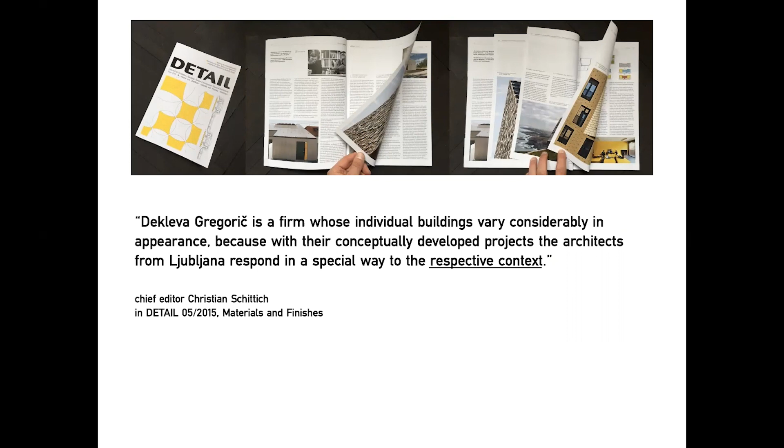So Slovenia is contextually very, very diverse. It spans from the Mediterranean to the Alps, although it occupies a very small territory. And in one of the interviews in Detail magazine, we stressed that our output varies considerably in appearance because our conceptually developed projects respond in a very specific and special way to the respective contexts where they are built. So if you see a picture portfolio of our office, you'll see a very diverse formal and visual approach, precisely because each building responds to its context, and it also responds to the people who are occupying these buildings, and they inform how these buildings are shaped and designed.

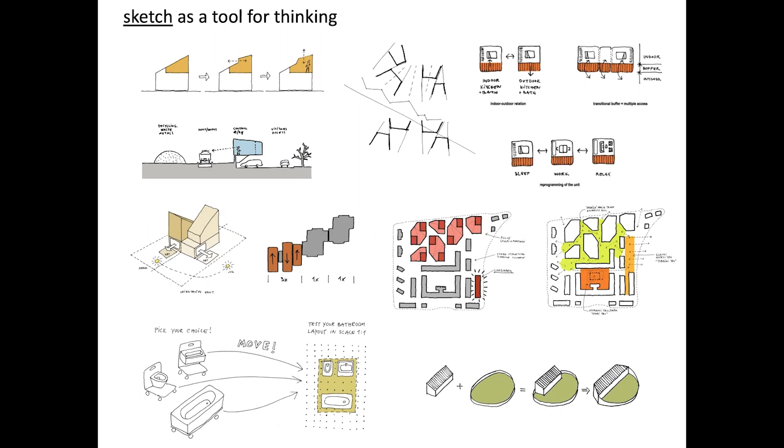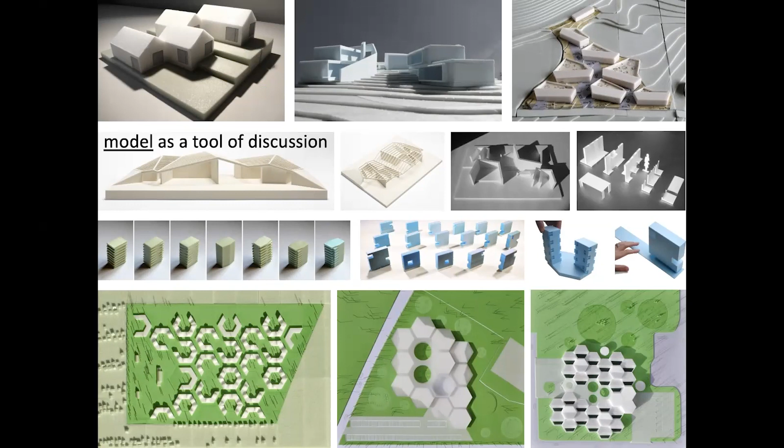But we take the sketch as the tool of thinking. So the process of thinking, we like to think, is always the same. It is always questioning in a similar research way what is the task at hand, what is important, and how that can be solved in a design piece. So sketch is a tool of thinking for us, but the same way physical modeling is the tool of discussion. With physical models, we are testing out options and variations that can be discussed within the team, in the office, but also with clients or maybe even the public on a larger scale. So both these tools are very important for development of a project.

So another thing which we like to stress, what is important for us in the office, is the materiality. Architecture is a discipline characterized by materials, and very early on in projects, when you start grasping the first concepts, we like to bring the discussion of materials to the table.

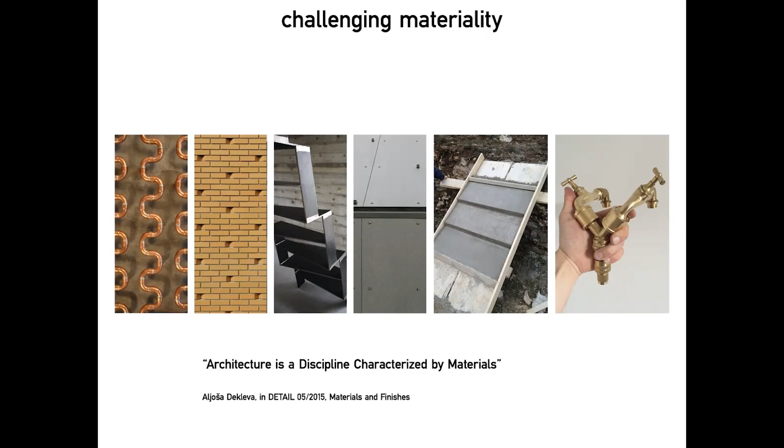In that way, the materials are playing quite an important role also in finalized outputs, finalized products, where we like to explore the possibilities that materials are actually giving us and to expose their specific characters.

So user, it's an important part of architecture because architecture is experience, and our buildings heavily rely on what users are specifying at the beginning of what they want those buildings to be. Sometimes it's easy to address a small group of users or one user in order to understand what it is, but sometimes we have to run scenarios in order to understand a larger user group, in order to embed those understandings into a building design.

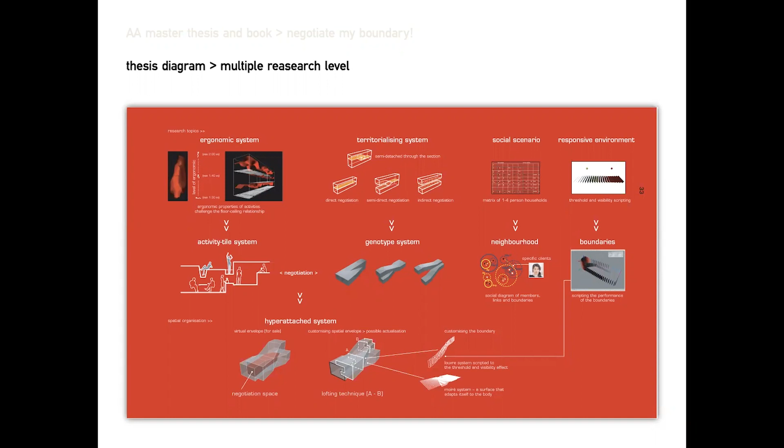So that's a diagram of the whole process that we were running through for a year and a half. We were studying ergonomic systems, territorial systems, social scenarios, responsive environments, and we created certain approaches or tools in order to create spaces, and we called our approach to design a hyper-attached system, in order to create a collective housing neighborhood in the middle of London.

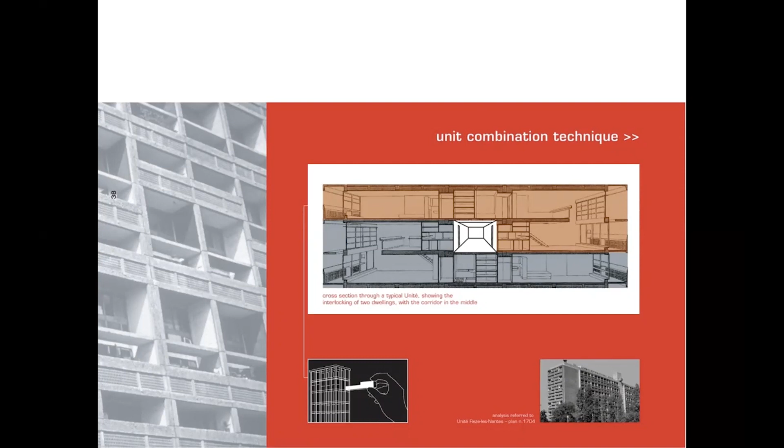We have started analyzing Unité d'Habitation from Le Corbusier, the one from Rezé-les-Nantes, in order to understand that these two units, interlocked units with a corridor in between, is a system that allows quite a lot of diversity. So we analyzed the whole block.

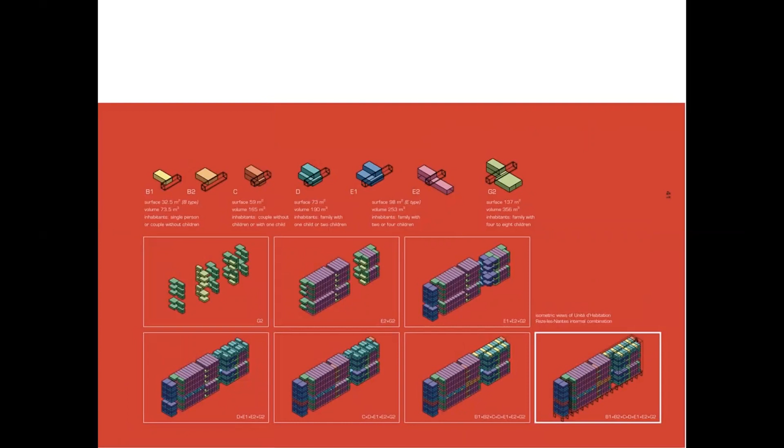We understood that there are quite a few different flat typologies, not just the one that Le Corbusier always shows in his diagram, which we saw before, very popular. But we understood how those units are interlocked and how they actually perform the different human needs in a very different way. So from a very small flat to very big units as well. So here we have a diagram of all different unit types and how they compound together in Unité d'Habitation.

But what we were interested in is how, from this research, the two units are interlocking together, and what are the possibilities that arise from having two neighboring units together, and what is in between. So is the between just a wall? Is it a between space? Is it something that we can share, and so on?

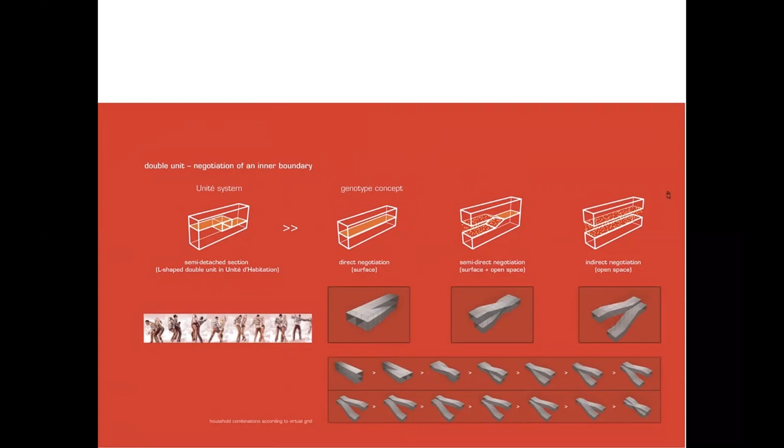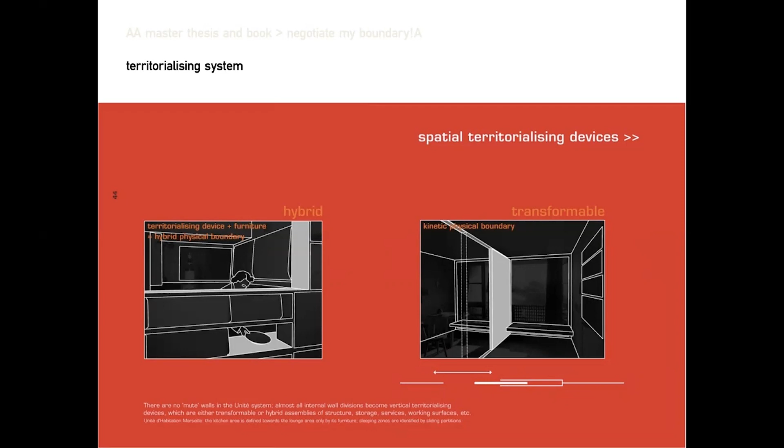So with this, we made different iterations of how two units could possibly interlock further on. We made a matrix of all the possibilities with a certain step of change. But we also started to analyze what are these territorializing devices. So what is in between different rooms even. So either those territorializing devices are integrated, or they are maybe transformable.

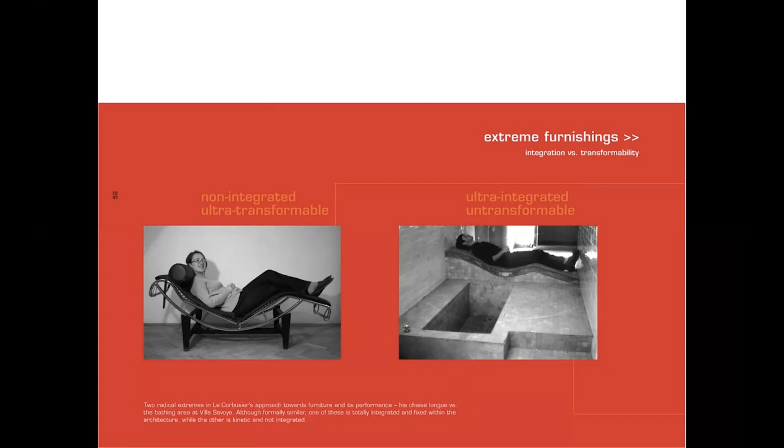We also looked at the furniture, which we categorized as non-integrated and ultra-transformable, that you see on the left, or ultra-integrated and untransformable, but part of the architectural envelope or mass.

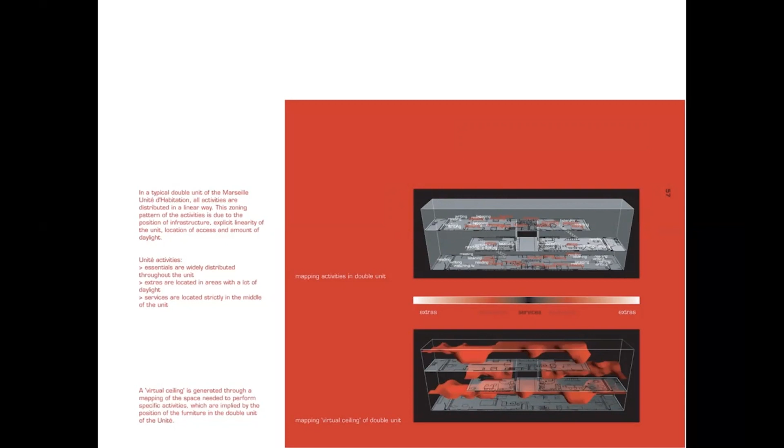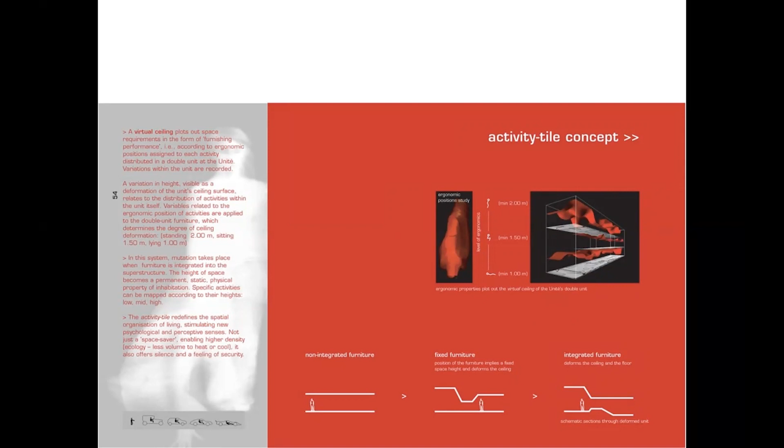So with this understanding, we went back to the Unité d'Habitation. We took the floor plan of Le Corbusier, and we mapped where each activity is being performed and how much space they really need in height to perform those activities. So we understood in the end that the floor and the ceiling can be challenged. They are not necessarily always flat surfaces.

So we came up with this conceptual section where we show this understanding of activities being related to the ergonomics of the human body and how those surfaces can interact and provide different spaces for humans to occupy.

So the next really important thing was the social scenario, to understand how society has changed. Twenty years ago, the trends were similar to today, but now they are even more emphasized. So most of the households are small households, maybe for one or two persons. There is an increase of the elderly population. In 2000, 21% of the total population were elderly. Then we understood that nuclear families still dominate the situation, but there are less and less. But there is also an increase in single parent families and different ways people are living together.

So we understood from there that you can make your own home public, and that you can also share your home, and that you don't need to own everything. You can maybe rent the service, or you can offer a service to somebody within your housing community. So we understood there is this notion of sharing, which is a strong potential, and sharing also brings negotiation.

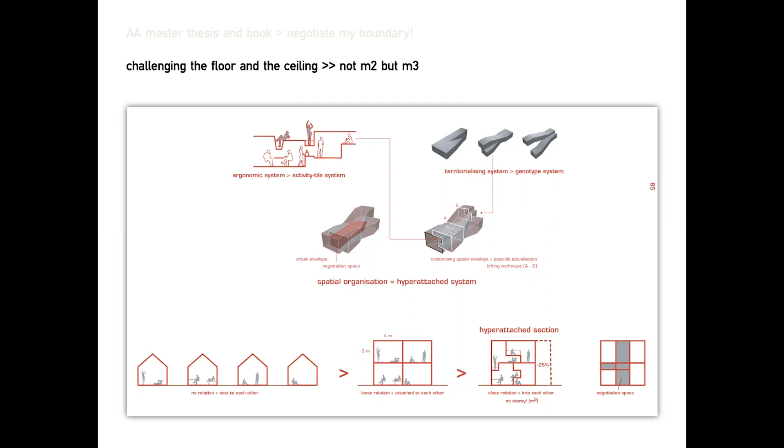allowing scenarios like that where two neighbors can communicate in a different way with spatial transformation of their wall in between, their boundary. And this led us to the idea of mass customization, of how collective housing can be mass customized.

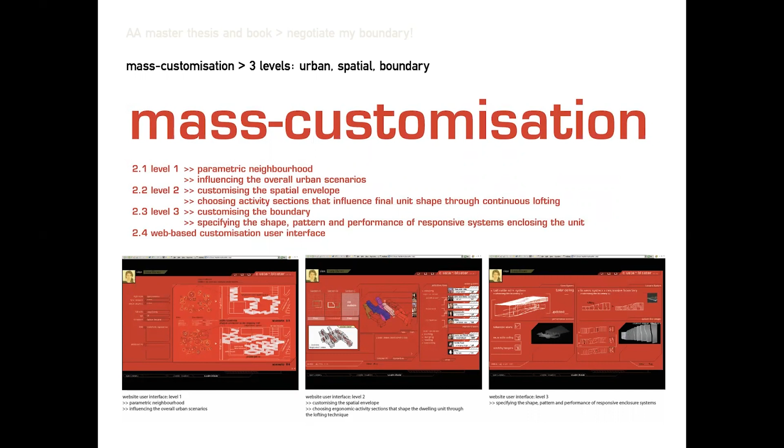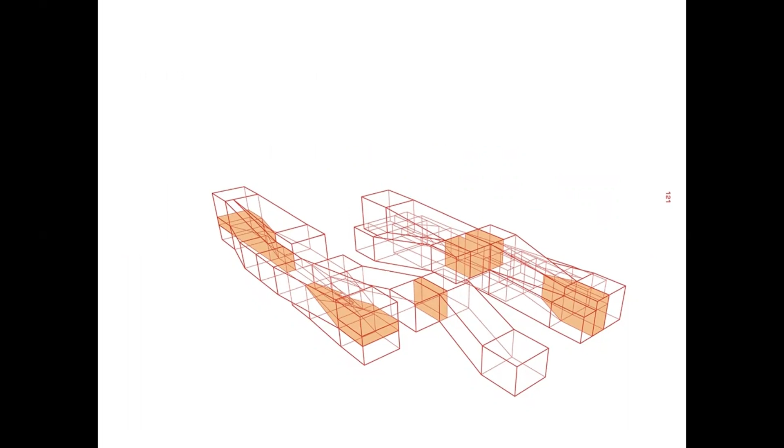So at the end, we came up with a spatial proposition where some of those spaces were to be negotiated, spaces where the people who are moving in can share them, and they have to reach certain agreements in negotiation. So we designed a web interface.

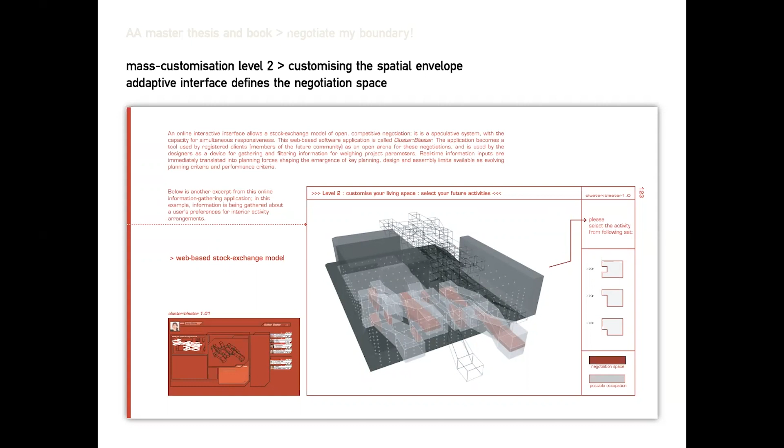Internet was a very new thing back then, where the society would form first online and then translate into reality. Quite similar to what the social networks are doing today. And you have to take into account that Facebook didn't really exist back then. So in a way, we were just before that.

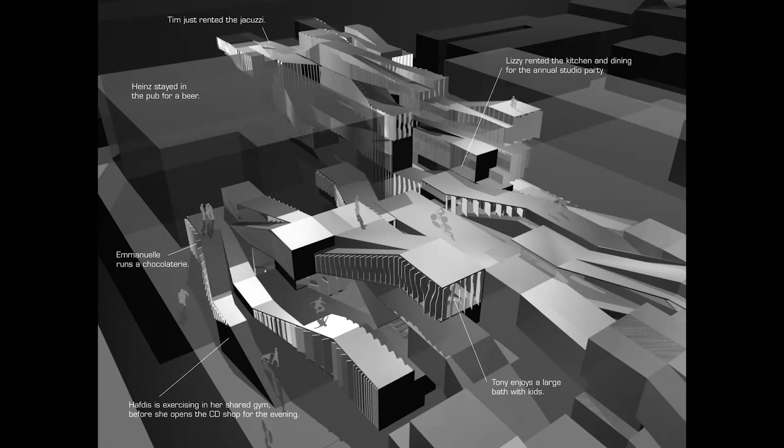So those social situations were translating into spatial scenarios. So at the end, next to King's Cross, this collective housing neighborhood looked and worked like that, with a set of social situations that were playing out through these scenarios of negotiation of boundaries between several units in this neighborhood.

Okay, so the second, more research part is the Home at Arsenale project. This was the Slovenian Pavilion for the Architectural Biennale in 2016 in Venice, where Tina and I were invited to curate it. So Alejandro Aravena invited us to explore the frontiers of architecture.

And we understood that if we address housing, that is going to be quite important; housing is defining most of our built environment. So it is important to address housing in order to address the most important aspects of human life as architects. So we decided to answer Aravena's question with research on housing.

So why home? Since the dawn of civilization, the structures of dwelling have constituted the predominant part of our built environment and have served to fulfill our most basic needs, but yet they should also go beyond just surviving. They should also provide the conditions for a meaningful life. And of course, the definition of home has continuously been questioned through history and through different cultural settings.

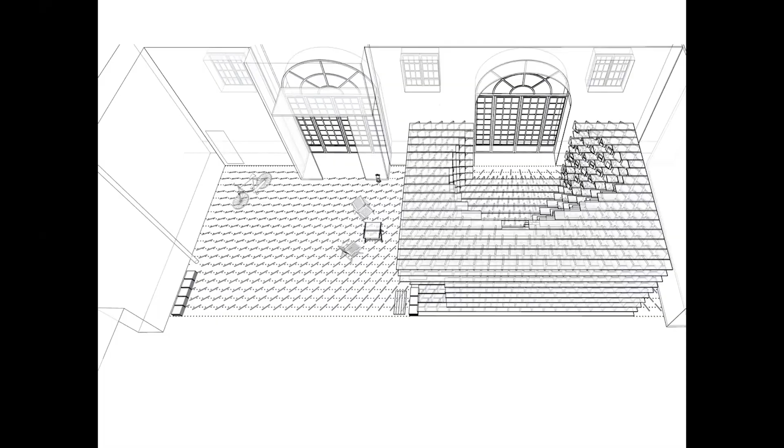And that was the reference to a project of Alison and Peter Smithson, where they did this installation, the Patio and Pavilion project in '56, where they said that the patio and pavilion represents the fundamental necessity of human habitat. The first necessity is for a piece of the world, the patio, and the second necessity is for a closed space, the pavilion. So in a way, this dichotomy, duality, was embedded in our pavilion as well.

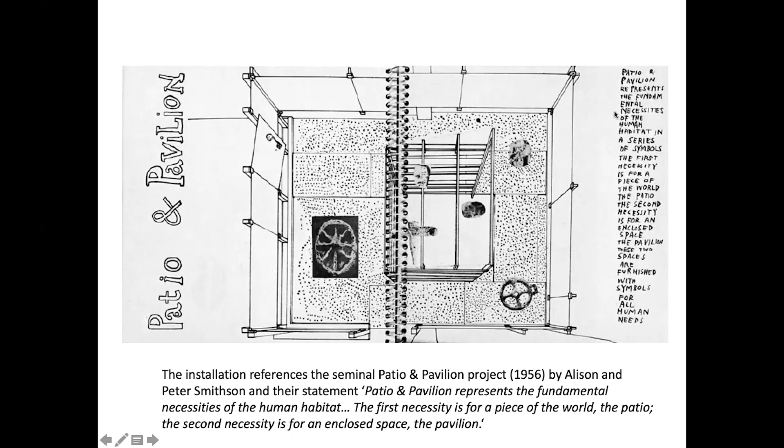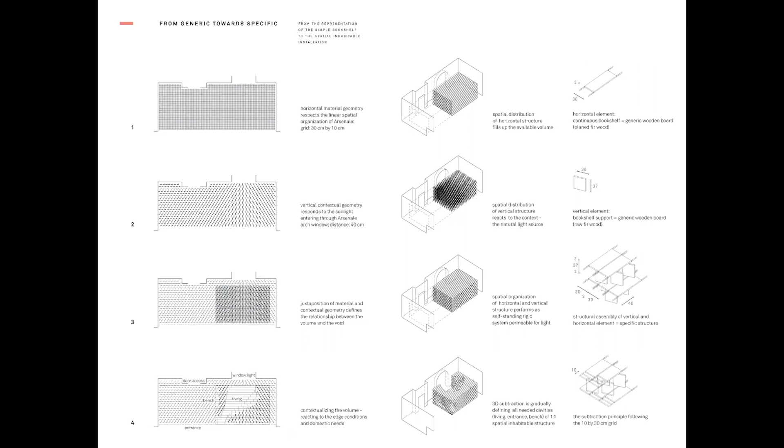So we filled it up with shelves, a generic shelf, like a piece of a wooden shelf that will be continuous coming through the pavilion. And then we started to carve out the spaces from this mass of 3D shelving in order to create accommodation for the books. So the structure at the end looked like that.

It was fully wooden. Why? Because Slovenia is very much related to Venice through wood. All of those oak pylons on which the city on the water is put come from the karst region, which is partly from Slovenia and Dalmatia. It's a big historical connection. But also more than 50% of Slovenia is covered with forest. So this also speaks about our national position. So the pavilion was like that.

And then in the process of collecting the books, we invited a little bit less than 30 professionals, not only in terms of architecture, but also designers, historians, theoreticians, writers, to propose maybe around 10 or 15 book titles, books that would address either the context from where they are actually coming from, or maybe something from their work. And the people we invited were spread around the world, so we could cover diverse cultural backgrounds. So everybody participated.

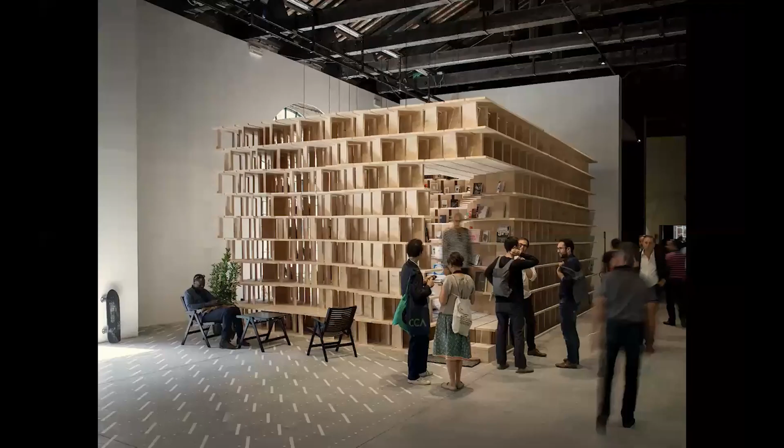But we also organized a set of events. So every week there was an event which invited either student workshops or people participating in conferences to discuss the topics of why home and dwelling is important and what it is. So what is characterizing home and dwelling today. So that's how it looked. Maybe some of you can remember it if you were there.

The books were exposed with the covers, so they were communicating with you, so everybody could spend here maybe just a minute to see the structure and the whole thing. But there were also people sitting down and reading through those books, and everybody got a surprise because it's such a diverse selection of books. It always offered a surprise to everybody, even though they were really knowledgeable people coming in here and engaging with our pavilion.

So not just the bookshelves, but also the stage for presentations, discussions, student workshops, but nonetheless a very important place for kids. Quite a few books in the selection were books for kids, understanding what defines home through the kids' perspective.

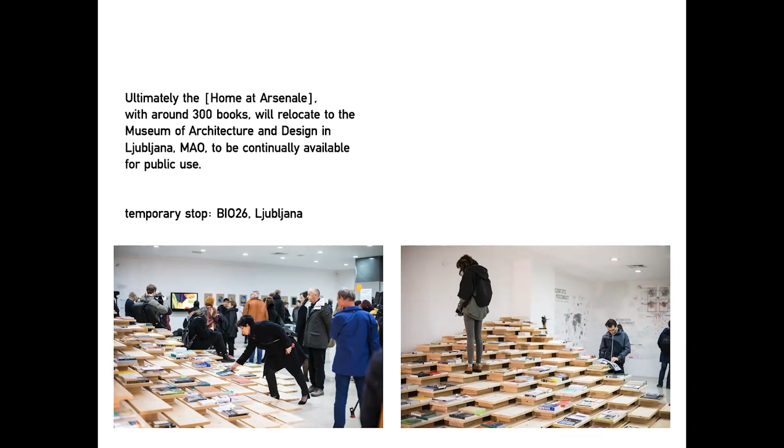So at the end, we wanted to create a pavilion which follows the concept of zero waste. So at the end of the Biennale, we disassembled the structure, we brought it in, and we reassembled it for another exhibition and showed the books once again. Until the books were brought to the Museum of Architecture and Design Ljubljana, where they are available now for everybody to browse. So they are back to the community, and we donated the wood from the pavilion to the Faculty of Architecture, which used it for equipping one of their experimental classrooms.

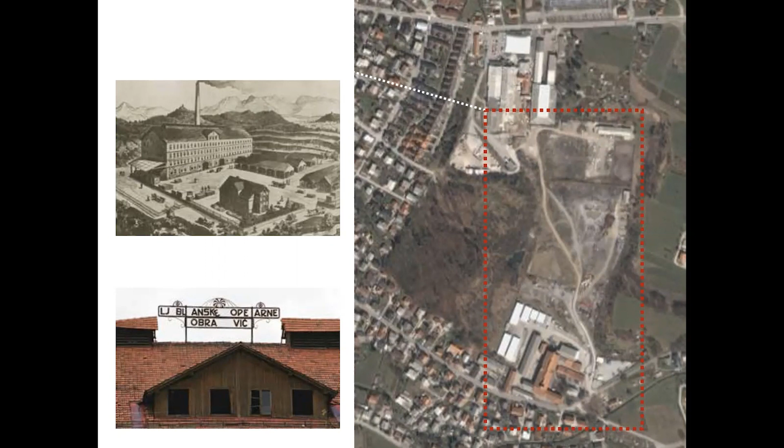So going to the practice, 3 projects: Brick Neighborhood, New Brdo, and Housing Novo Brdo. Brick Neighborhood is a competition we won in 2005. It is in Ljubljana, in the center of our country. It is on the edge of the city, in the area where formerly there used to be a brick producing factory. So they were excavating clay and producing bricks, mostly for building Ljubljana throughout the 50s, 60s, 70s, after the Second World War.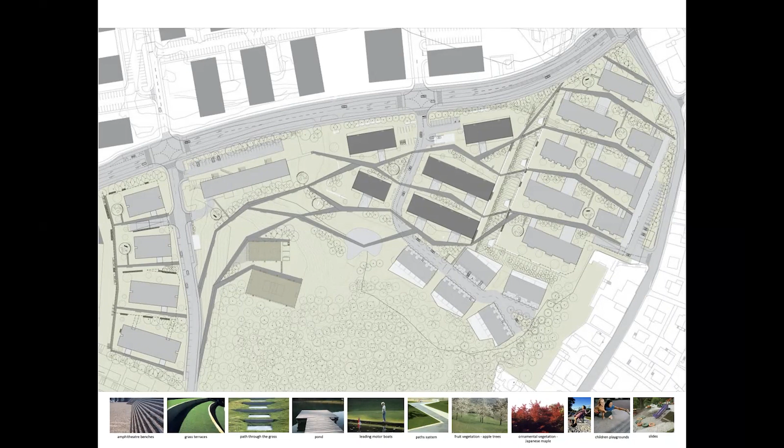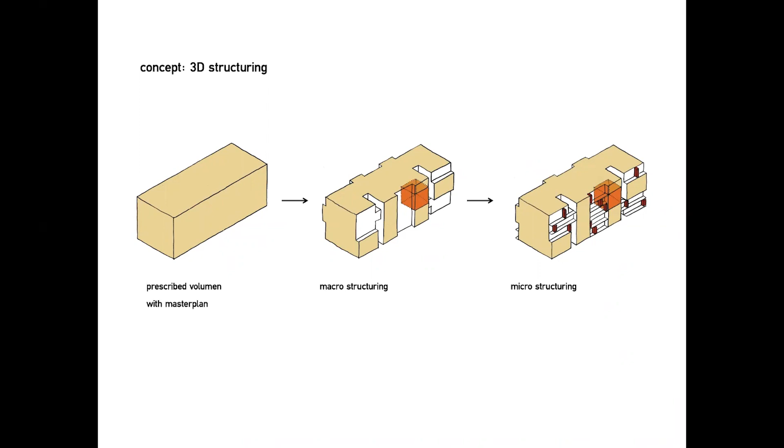So we're not responsible for the urban planning, and that was a bit painful. We engaged in organizing those volumes internally and designing the facade. So that was the limit of what we could do. These prescribed volumes, we understood they were too big for the area. So we went into a process of micro and macro structuring those volumes in order to create something that is closer to the human scale.

So the organization of the flats: the slab was too thick to have double-sided orientation of the flats. We made the central corridor, but we split the core, the elevator and the staircase, into two different ends, so we could get some natural light to each end of the corridor.

We try to organize the individual units in such a way that they can be split, or they can compound together. So they can follow the dynamics of the family if it grows or shrinks. So people can also split the flat and maybe rent out the other half or similar.

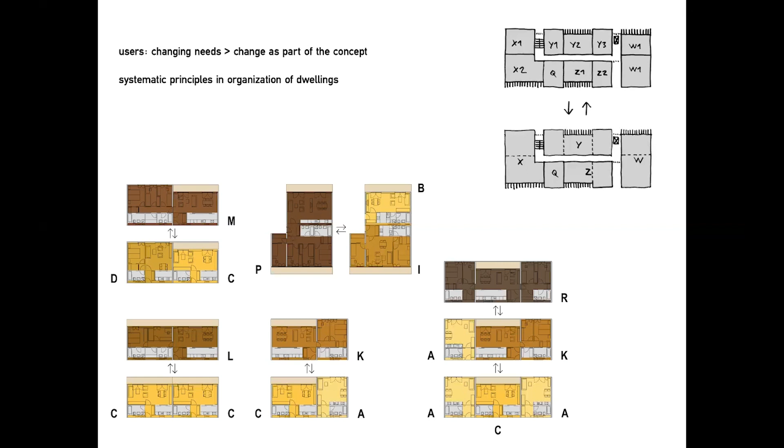What wasn't asked in the brief, but we proposed it in the competition, is a common and shared space, coming from our research of negotiation by boundary, understanding that the community in collective housing can only be shaped if they have a common space that they can speak about, share about and negotiate about. So this is what creates community, and we wanted those communities to be working well in our buildings.

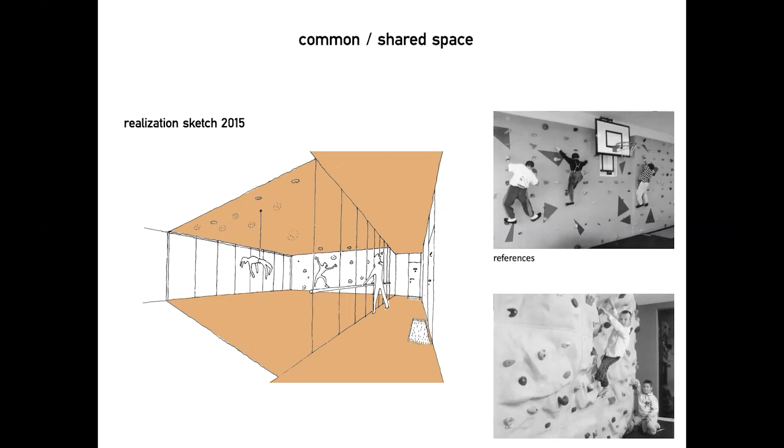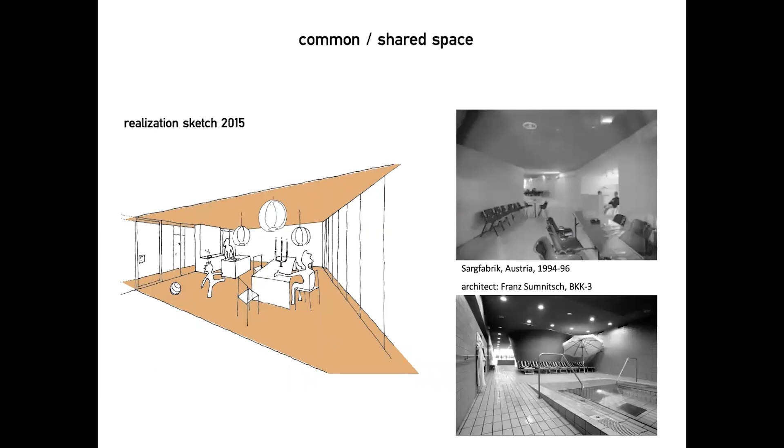So we proposed that maybe for the sake of one extra flat, we should create a communal room where we could do different kinds of activities for everybody, and they can understand what they can do with that. So you have here a couple of examples on the right side from Austrian architects, how they were doing that.

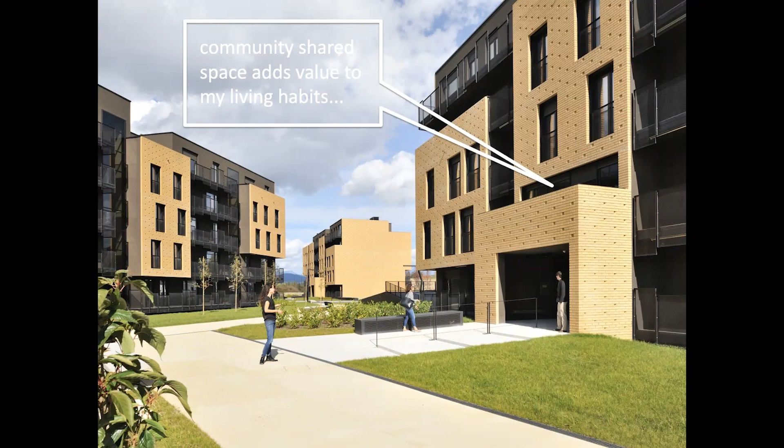So the shared space we positioned exactly above the entrance, with a little balcony or terrace, so you could always communicate with that shared space whenever you were entering and exiting your building. So that's in a way a very generic space, open for very different types of uses. And nowadays it's being used for kids' parties, for improvised kindergartens, for community meetings, for yoga classes. So all these things are actually being developed there through the life of these buildings.

So this macro structuring brought the duality of the facade. One is the brick-clad facades, which speak about the context of the location before, and then those balconies, which are pushed back a little bit, and they provide space for people to live in and occupy in order to show their lives on the facade.

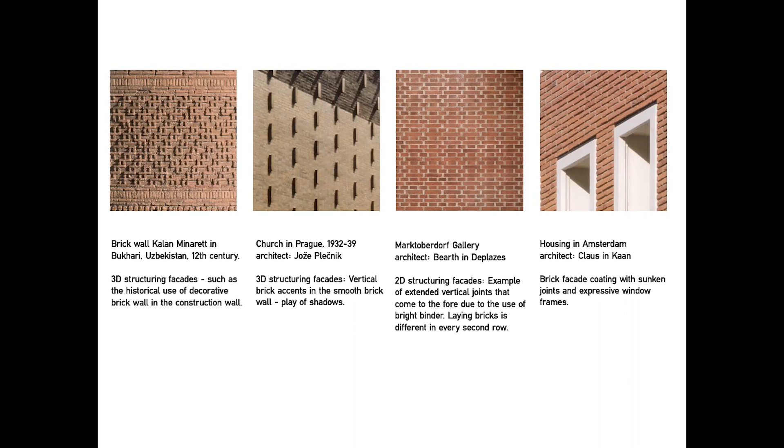Materiality was very important. I mentioned the brick factory, so we wanted to keep this story on. Here are a couple of references. Plečnik again, brick is a very important material for him, or Max Fabiani, another historical brick building, or even Edvard Ravnikar I was showing at the beginning, where brick was one of the key elements for his expression of building continuity. The corner is never finished, it always continues into space.

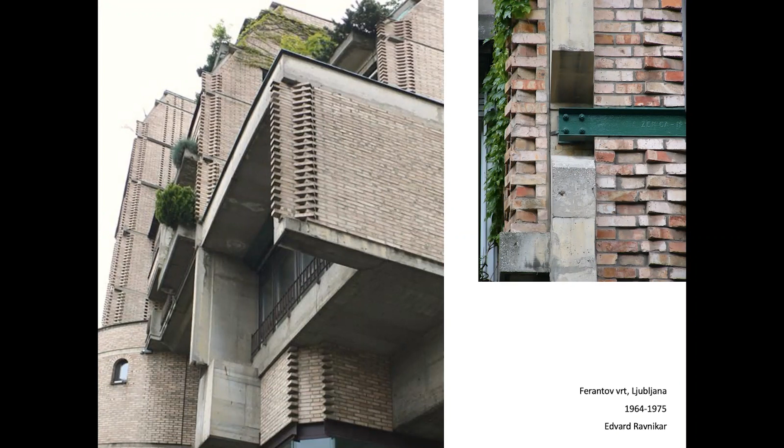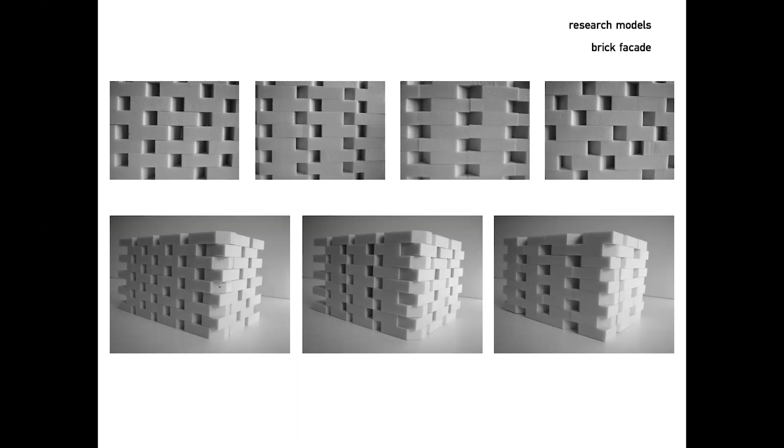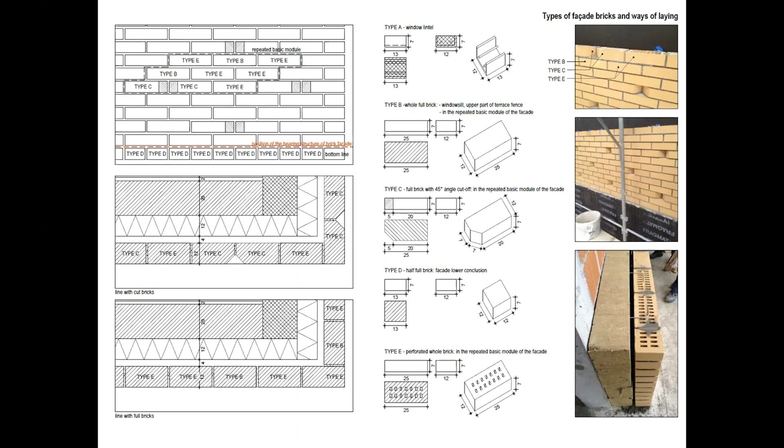So we went into understanding how we can use typical bricks. The housing is very inexpensive housing, so we didn't have the budget to use custom bricks, but bricks that are just off the shelf, and how we can create different textures that work at different scales, from far away to closer, to understand all the detailing, how those things are put together in order to create these little textures on the facade.

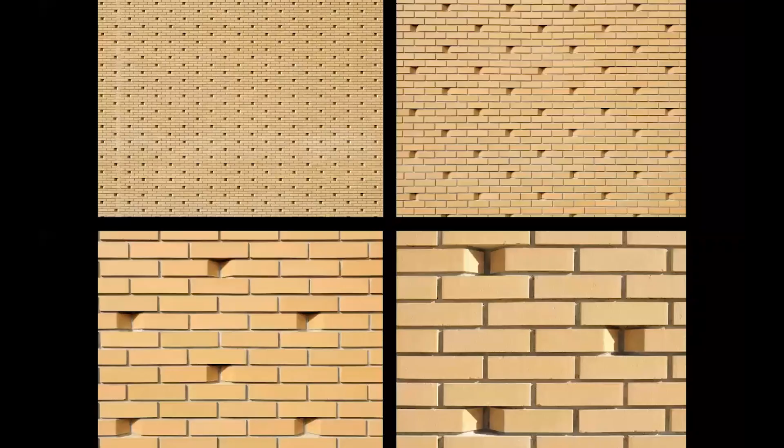This is the picture from the building site. You see that the clay, the ground on which these buildings are sitting, is the clay from which those bricks were produced, which are also chromatically the same, again, to speak about the past of the location, translated into this building in that way. So it works differently from different distances, so you can always understand a texture on a different level, and that's it.

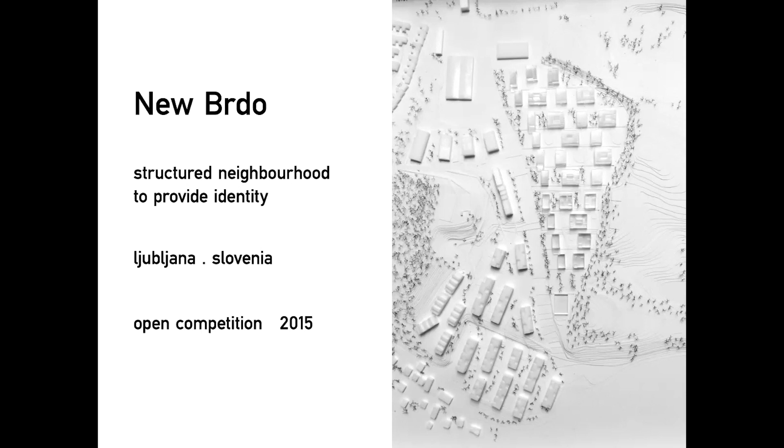So the next project is again on the same location. That's another competition that we won 10 years after the previous one, but with a huge difference. Here the brief didn't have a predefined urban planning, and it was a two-stage competition. So it was our job to define first the urban layout, the massing, and then in the second stage to define the architecture and the structure of the dwelling units. So it is a pretty big site. It is 500 flats, and we distributed them in such a way that it's pixelated, with small buildings that occupy the site in a certain structural way.

So we identified 5 levels of community creation or community identification. So first one is the whole area, including these 500 units, that you can identify yourself with the neighborhood. The second is the street, the walking street, so without the traffic, which all the entrances of the buildings are being oriented to. So you have 1, 2, 3, 4, 5 subunits, sub-streets, small neighborhoods. So that's the second layer.

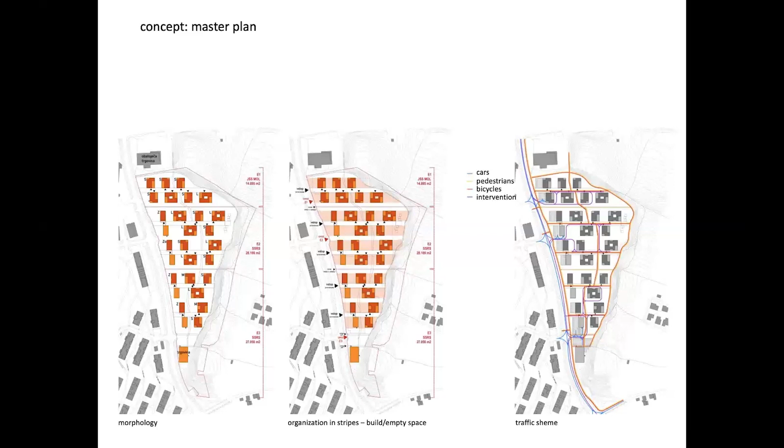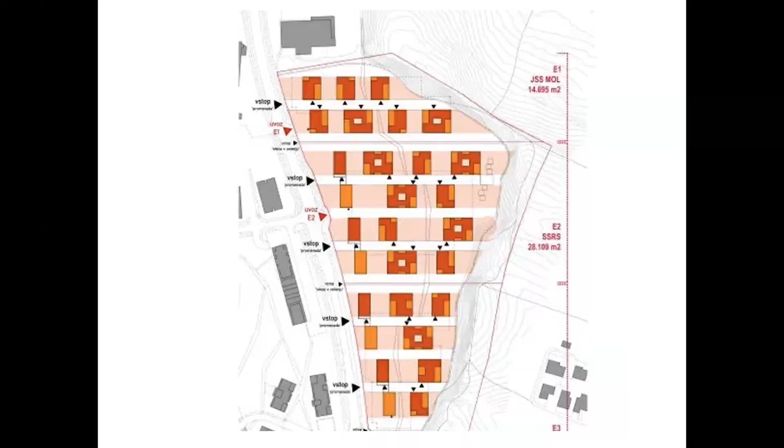The third layer is your own block where you are living, so the building. The fourth level, it is your unit where you're living together with your small, well, nuclear family or community that you're living together. So the basic unit. And then the fifth level is your own room where you have the ultimate privacy. So in that way, the building is socially structured. So you always have a certain scale of identification with your community, which translates in this kind of spatial arrangement. And it looks like that.

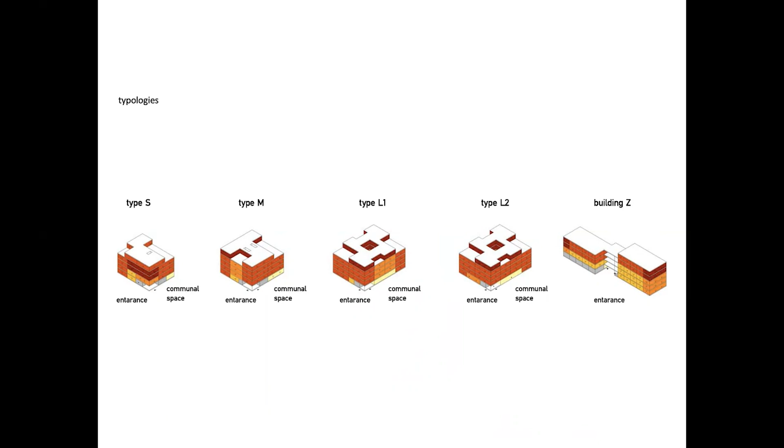So we have proposed 3 types of block buildings and Z buildings at the end. So it has a different edge condition towards the road. So it has a different typology in order to distribute the structure of units that the client wanted. So that's the type S. It is always a central core and corridor to be as compact as possible for circulation, and then the dwelling units around, which allows for the corner units quite often that can offer quite good light conditions and the views you can share.

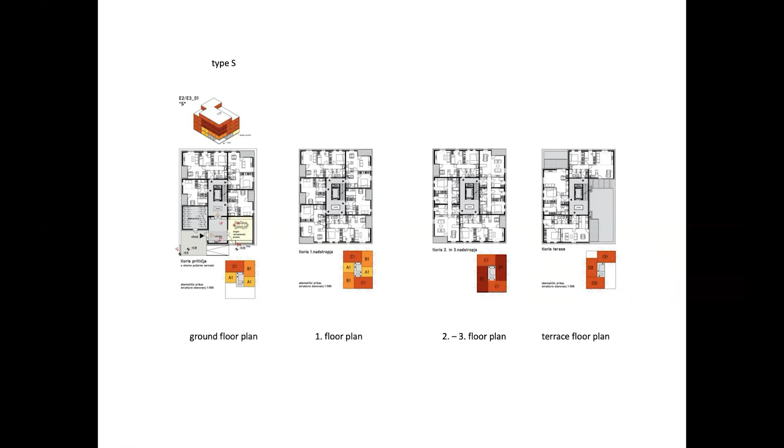So the M type with a little bit bigger core with some atrium, and the large type, the L type, which has an atrium inside with a big space that can be appropriated through time for different uses of the community. Maybe one more thing to stress here is that when we were studying at the AA through this project Negotiate My Boundary, we read Luhmann, a German sociologist, who was stating that the community can only happen in a certain scale of people living together. So up to, let's say, 30, 35 flats being part of one building still can generate community. You cannot imagine community being generated in a skyscraper where you have like 100, 150 units.

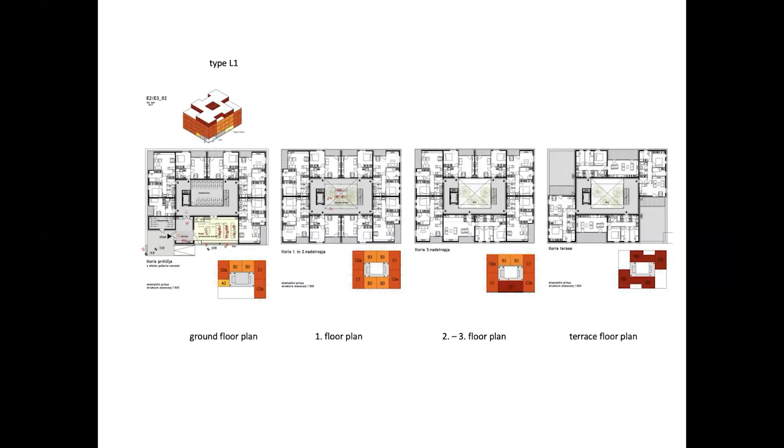That's why we structured this project in individual buildings that are small enough in order to have this under 35 units size, so the communities have a chance to be created. So again, what was very important, and this time the client, which is the same client, Slovenian National Housing Fund, as the previous competition, understood that shared spaces are important. So they already put it into the brief. So they asked for shared spaces. So we proposed shared spaces now in a little bit different situation. So we put them in the ground floor next to the entrance.

So the shared space of each of these buildings can work twofold. So it has an entrance from the inside of the building that is meant for the people who are living in the building, but it also has the entrance from the street. And that opens a new possibility for this space not to be only a social space for the community, but it can also be a transitional space or communication space with the public. So they can start running here also some public events or maybe even slightly commercial events in order to sustain their communal budget.

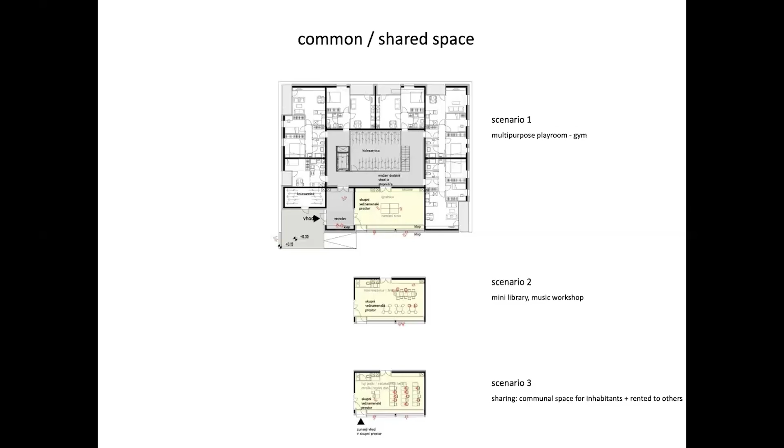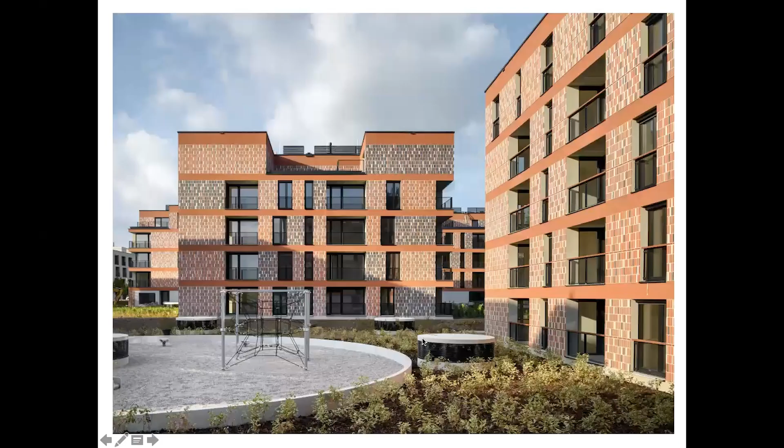The whole layout is on a checkered layout. So each facade always has an empty space in front. So all of those spaces in between, even maybe more important than the buildings themselves, they are equipped with greenery and playgrounds for children, but most importantly also the parkings which are underground, they are not occupying the whole surface of the plot, but some of those spaces in between the buildings, the courtyards, they don't have parkings underneath.

So it allowed us to bring there big trees already that are going to grow and actually create a park situation, not just a grass type of greenery, but really 3D volume of green, which is very important for housing. So here you have a pump track with one of those streets ending up in nature with this kind of sitting area here.

So the outside public spaces are very, very important for the community to actually work together. Okay, so the last example of collective housing is Housing Perovo, which is a little bit different. This was commercial development in the Alpine part of Slovenia, which recently was hit with a lot of flooding. That was very heavy on the buildings next to the river. We are a little bit more up.

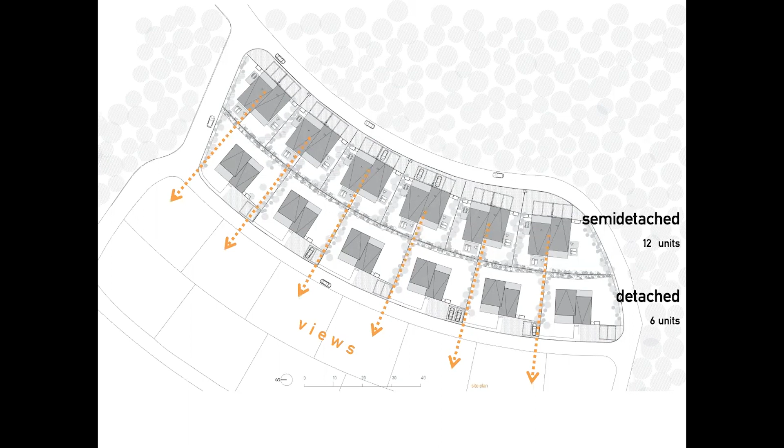So it was already a predefined set of parcels, but we distributed those houses with the upper row as twins and the lower row as individual houses. So the twins always have the view in between the individual houses to this mountain scenery. And then further on, we proposed different smaller types of houses in order to dissolve the density towards the view.

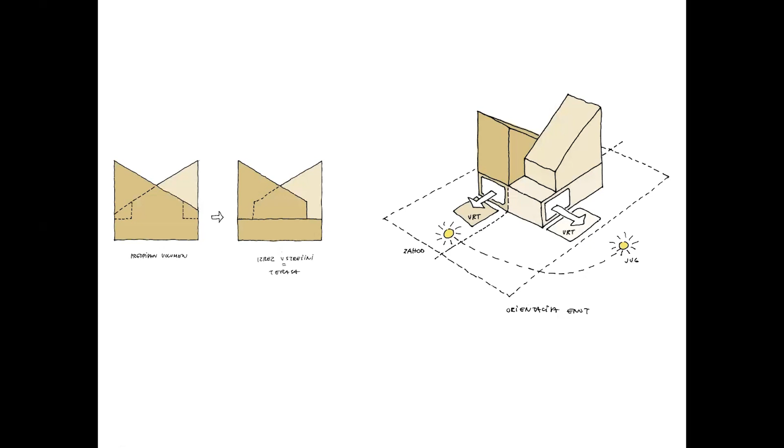As those lots are really small and really close together, a typical suburban situation, we thought about offering a little bit of privacy to each of the people living here. So the twin house is not two identical units; the two units are slightly different. Each one can have its own orientation from the living quarters to the garden in a different way. So they are not just over each other, but they have a little bit of privacy.

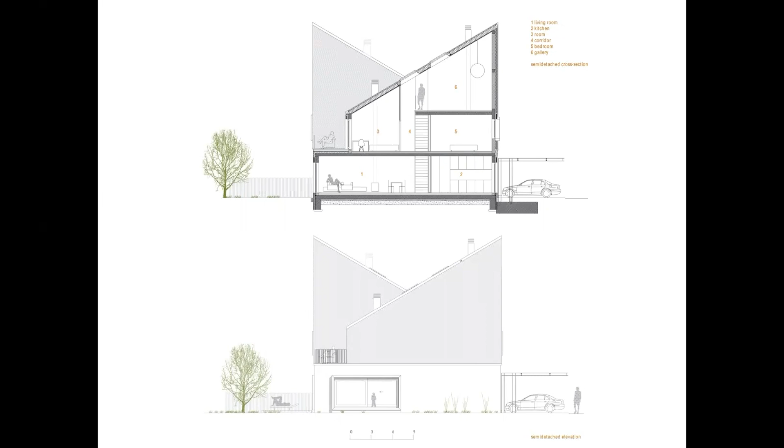The volume and the typology of single slanted steep roof was already predefined by the urban regulations. So we developed this section of 3 stories, where in the top you have a gallery. The basic living is in the ground floor, very traditional, sleeping in the first floor, and then the third floor for extras, hobbies, and so on. As the volumes are relatively tall, we divided them materially in 2 parts: the plastered ground floor base, and the upper floor clad with wood, where these wooden volumes identify the neighborhood, and it seems smaller than it actually is.

So you have these images of the driveway, like suburban situations. You drive in, you have an entrance, and then you have rooms above. Some of the rooms have little balconies, always in a corner. These are the kids' rooms, oriented to the middle of this development, so the kids, maybe more social, can start communicating with each other. The master bedrooms are on the other side.

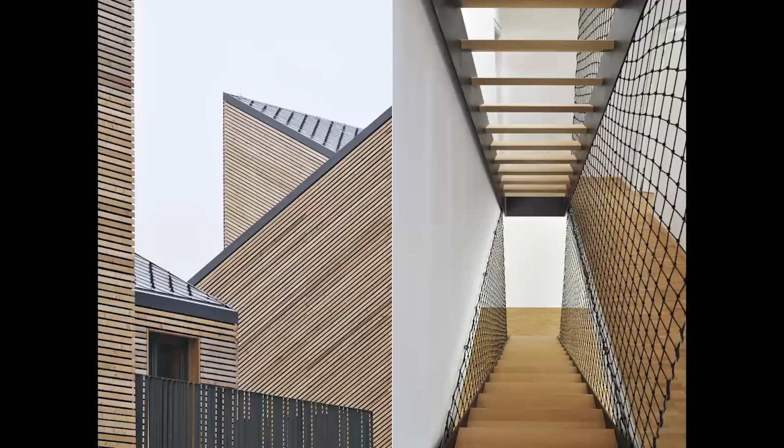Materiality: snow holders, because here during the winters there is quite a lot of snow, and the interior, which doubles the materiality. The alpine area is very much related to building with wood. That's why wooden cladding on the outside, but also wood on the inside. But in a commercial housing project, you don't know who's gonna live here. So the only element which is designed and defined is the staircase. The rest is left as open as possible for different lifestyles to unfold in these buildings. Okay, so that's about collective housing.

Now I'd like to share with you an attempt of understanding how an individual house can also become a collective understanding. Obviously, when you do individual houses, you always communicate with one client or a small group of people. Those users are pretty much defined, and it's always a bespoke solution made for those people. But the question here is how everybody can have the opportunity to have an architecturally ambitious house designed by architects, reaching a larger amount of people.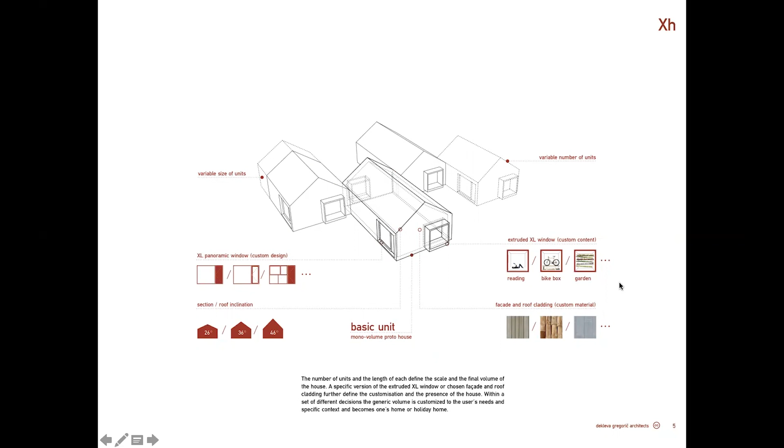So we understood we need a very flexible system, a system composed of units, which can grow or shrink and be customizable to different contexts or different user needs. You can have a different number of units, different types of windows, maybe even recycled ones, different roof pitches. Mediterranean, for example, has a different inclination as opposed to the Alpine typology. You can customize the cladding and so on. Either you have a small unit, a 2 unit house, a 3 unit house, or even more.

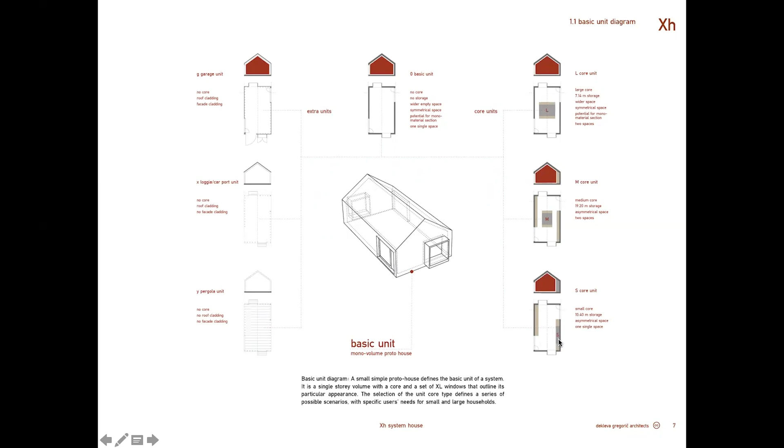But the main point is the basic unit, where the structure is always the same, but we have developed 3 different types of cores. One is a large core in the middle, the other is a smaller or medium core, which is maybe complemented with some storage on the sides. And the unit without the core, where maybe it's just a small service program integrated into the wall.

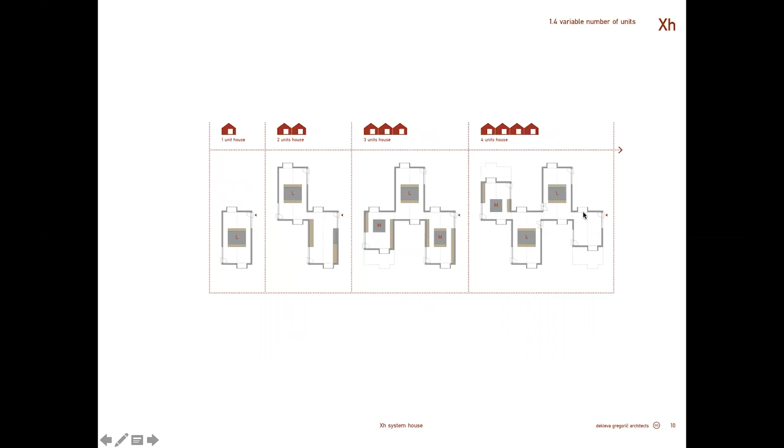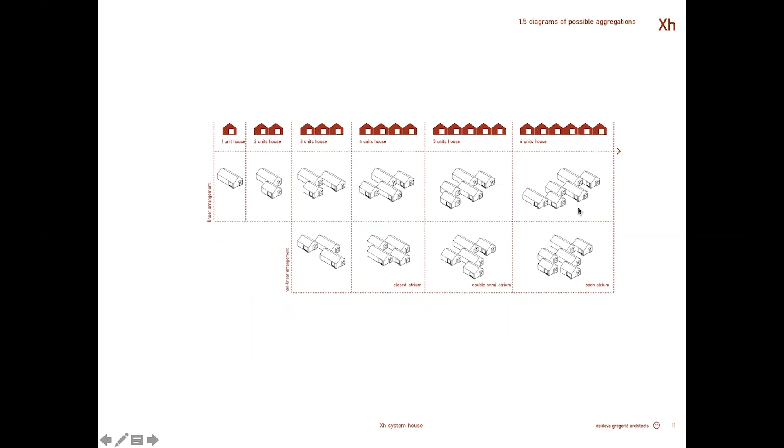So these units can be done in different stages. So it's maybe fully clad, or just a covered loggia, or maybe a pergola. And in the matter of how many units you can attach to the whole system, here you have different possibilities. We created a matrix that can go to infinity in a way, theoretically, but it can provide for different scenarios.

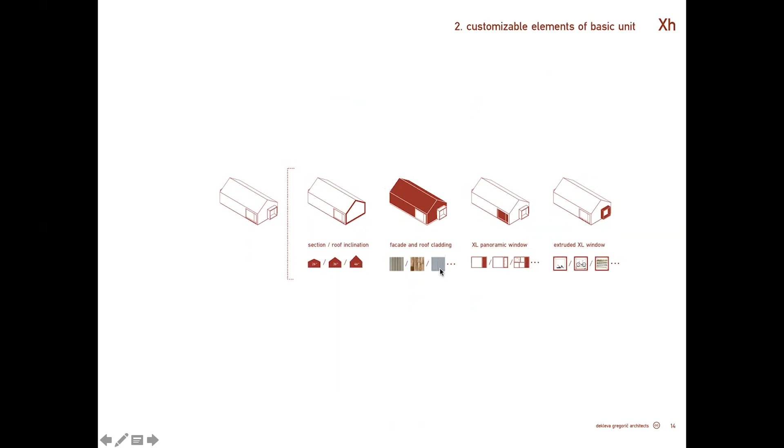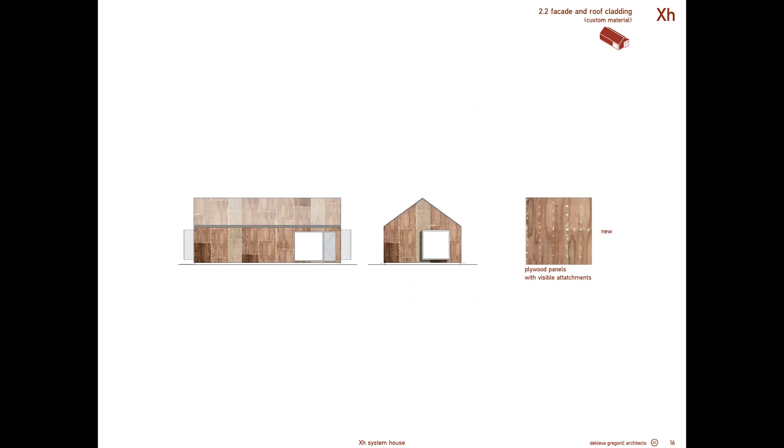So in order to understand that the project works, we created quite a few scenarios with disposition of furniture, understanding all these 3 typologies of units. And we also understood how those elements can be customizable. So a Mediterranean pitch of roof, continental or Alpine. You can clad it with timber. You can maybe just use plywood panels, maybe reclaimed plywood panels, or reclaimed corrugated metal sheets.

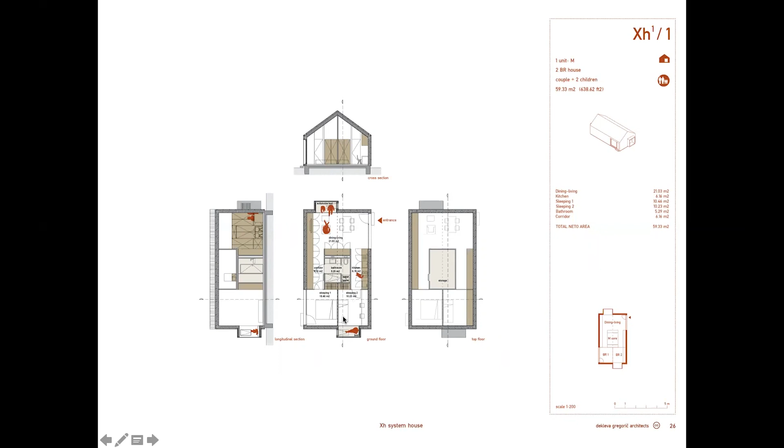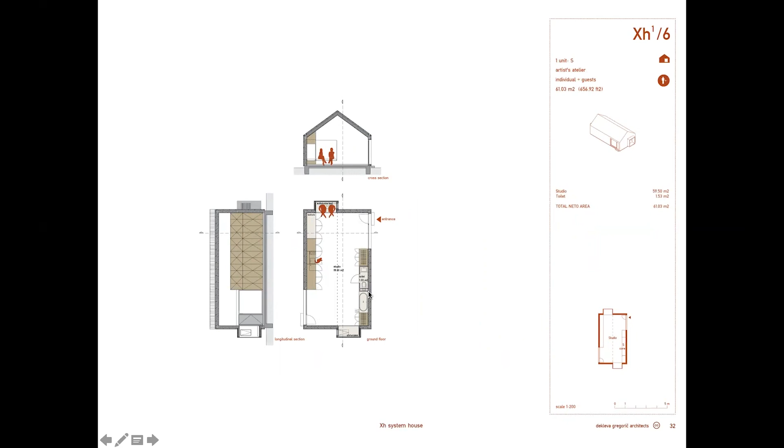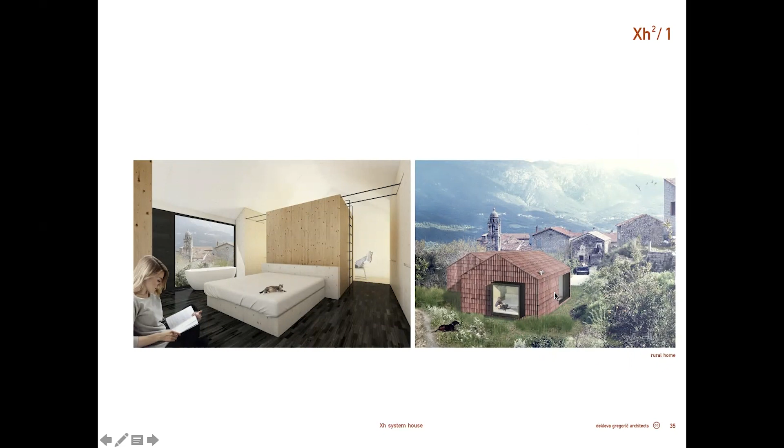From, let's say, a small unit, a 1 unit house, which is maybe for 1, 2, or 3 people. It has 1 bedroom or maybe 2 bedrooms. It offers a couple of scenarios. For example, a small nature retreat somewhere in the Mediterranean, or maybe a unit with a small core, which is a little bit more open. It's maybe an artist studio, and you put it on the rooftops of one of the world's metropolises. Or maybe a 2 unit example with 1 bedroom, or another one on the top of the core, where you could see it clad with clay tiles, and it's part of, I don't know, a village in Toscana.

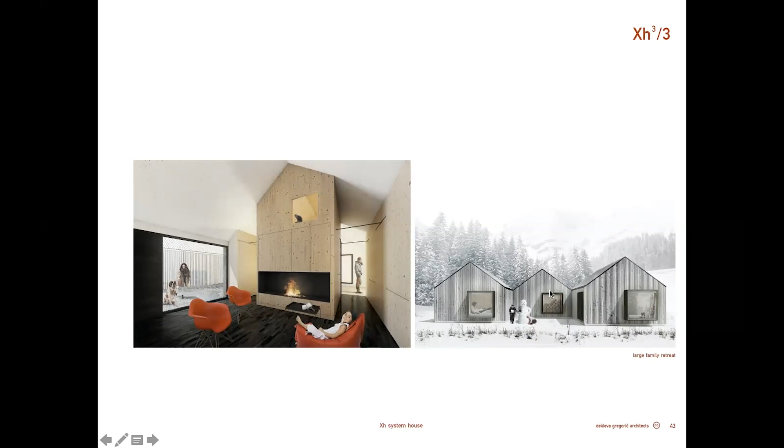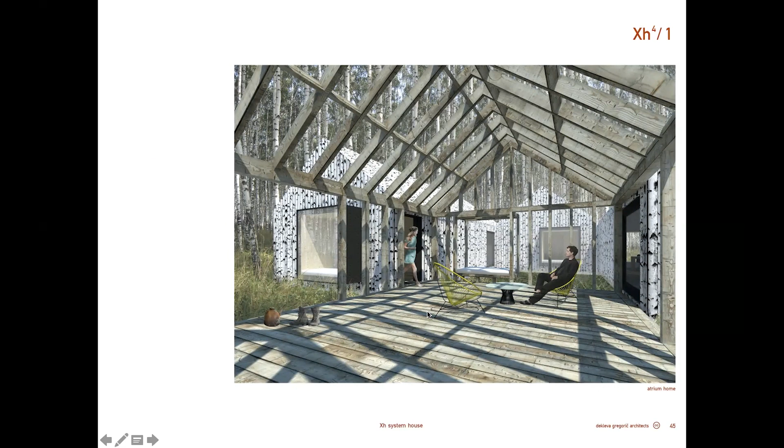A 3 unit type, maybe an alpine retreat, a winter house, or maybe an atrium typology of a building that has this pergola. It's something that you can have in the woods, or even further on with a bigger situation.

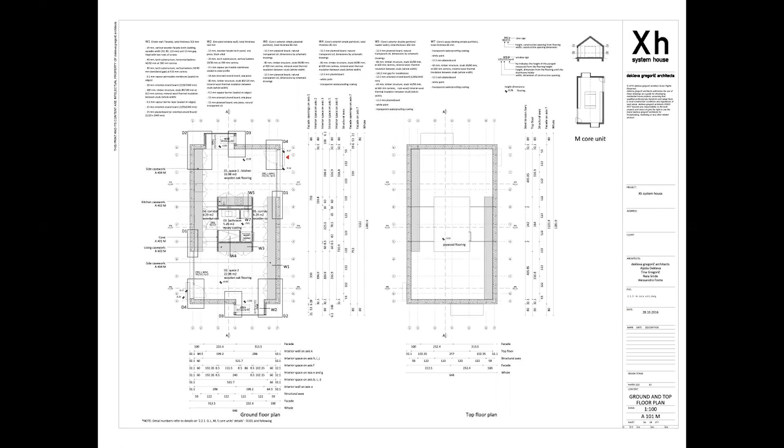So what we've done at the end of this project, we actually created a full set of execution plans, which you see here. So all the detailing, everything is drawn in detail and defined, calculated with structure. So there is a full set of construction drawings that are available for everybody. We have this on the website, and you can request it and fill in the form. We have been sending this to so many people around the world. They fill out the form so we understand their initial needs, and we send them the whole project, so they can either appropriate it, build it, and so on. So we are still awaiting feedback on some of those to be built or reappropriated. So it's going to be a long-term project to see how this develops.